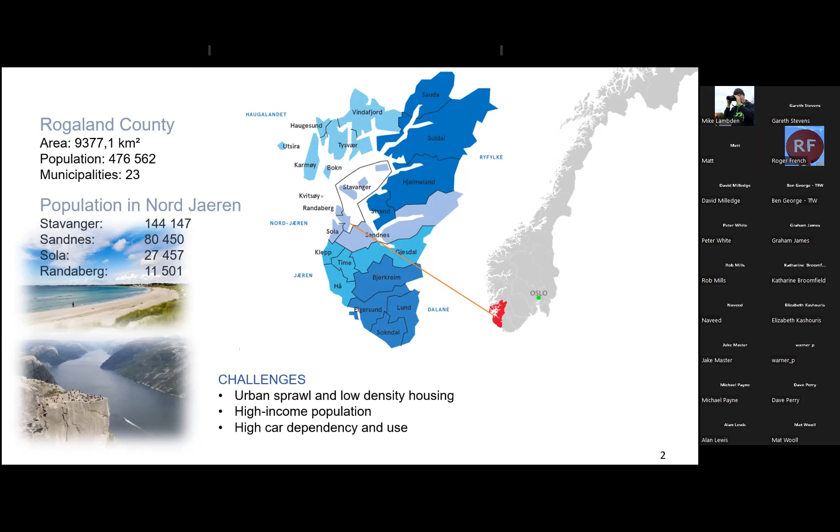A little bit about how the public roads administrations are organized in Norway. We can divide it into three tiers. At the top is the Norwegian Public Roads Administration, who among other things has responsibility for the motorways and regulations. Next layer is the county roads, owned and managed by the county council. Then you have the local roads and streets, owned and managed by the local authorities.

Until the end of 2019, the Public Roads Administration did the planning and building of the county roads for the county council. From the 1st of January 2020, we were transferred to the county council - I repeat, the county council, so I hope you get how it works. That meant a different employer, but the same jobs and functions.

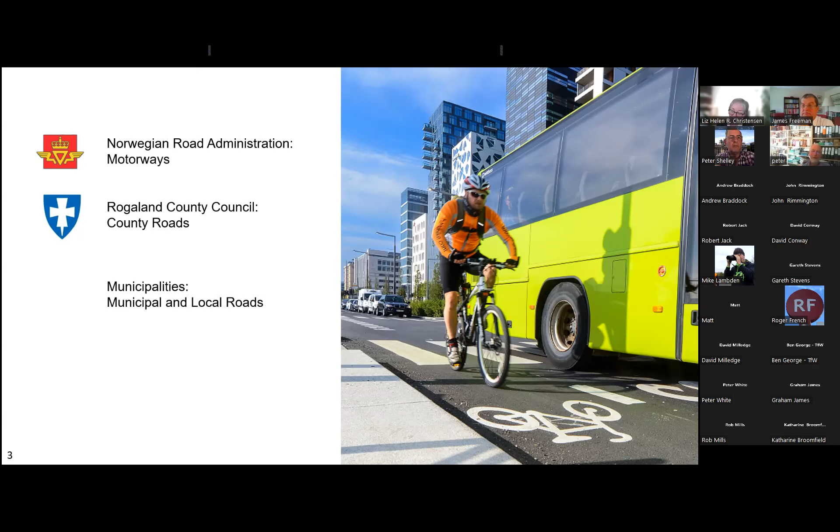This is quite important for Bussveien. The Norwegian Urban Growth Agreement, the UGA, is a governance platform combining transport infrastructure development with land use and transport policy. It is a response to the Paris Agreement. The intention is to stimulate urban growth in populated areas in Norway, among other areas, and thus reduce the need for transport by private cars.

The agreement ensures that Bussveien and a bicycle highway and motorway project have got the necessary state funding - I'll tell you more about state funding later. An important condition is that four municipalities agree, which they have done. Bussveien, though, only runs through three municipalities.

So the zero growth goal means there should be no rise in travels by private cars, and a modal shift from cars to public transport, walking and cycling. Separated bus lanes will ensure that buses will not be affected by congestion. This is important when we want public transport to be trustworthy and precise according to the timetable. Buses will have priority through junctions and roundabouts. In effect, this will be a light rail on rubber tires.

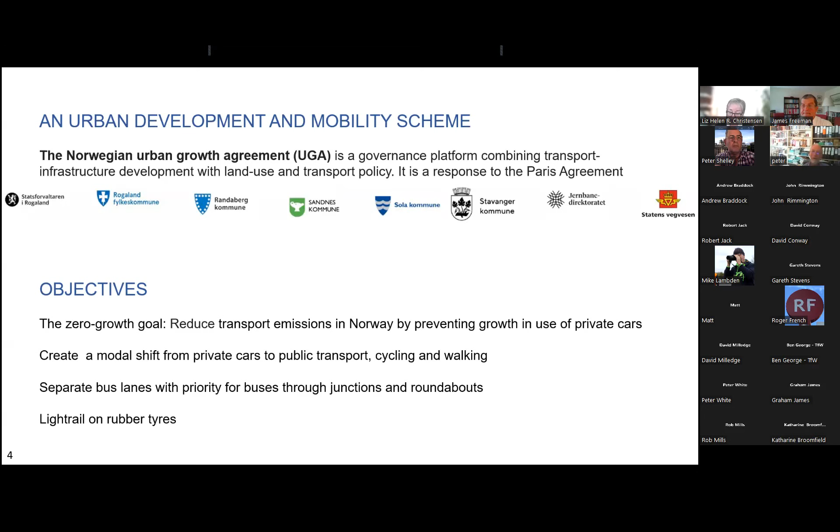We have divided the 50 kilometers into four corridors, where corridor 1, marked with red on the map, is the most important. It runs between Stavanger and Sandnes, the two main cities in the region. It is along this corridor the urban growth and densification will be most significant, and it is here the focus areas are situated.

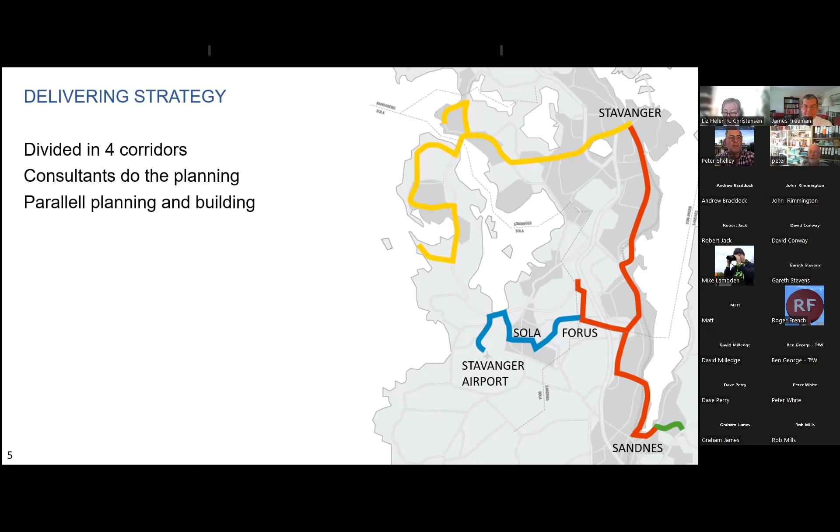When finished, it will be a 50-kilometer BRT scheme with dedicated and separated bus lanes, as I already told you.

The whole project is split into 26 sub-projects for several reasons. It is run as portfolio management, which means it is possible to reduce the total length if it doesn't meet the goals set by the agreement, the UGA.

Bussveien goes through three municipalities: Stavanger, Sandnes, and Sola. As you may see here, I've split it into sections with these black lines.

Four of the authorities have to agree on the decisions. One of the municipalities does not have any parts of Bussveien, but has interests in one of the other projects under the UGA. So I'm sure you appreciate how complicated the project is when we have to collaborate with three different authorities and manage 26 different sub-projects and still make it appear as one overall project.

There are many opinions and voices, not just the authorities, but also in our own organization. Being a public and very visible project that affects people in general, it's even more complicated. It is no wonder it takes time to plan, because it has taken considerable years - more than 10 years in planning, I think.

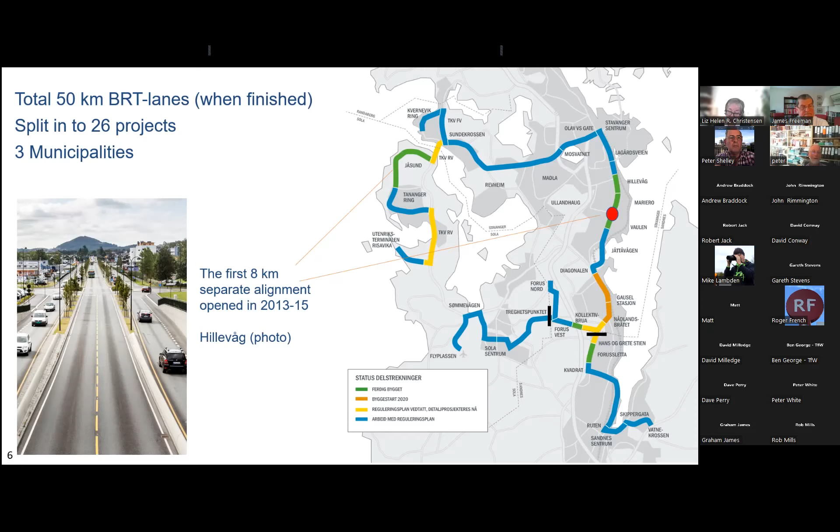This illustration shows how we are separating the bus lanes from other traffic with central reservations. Along most of the line, there are bicycle lanes. As I told you, that's a very important part of Bussveien as a concept.

So there are a few exceptions due to local conditions when it comes to this cross section. We can't do this for all the 50 kilometers. But I'll tell you more about that later.

As a concept, what characterizes Bussveien is first and foremost the separated bus lanes, as I just showed you, priority for buses through junctions, large bus stops which we call stations, and pleasant bus rides and reliability. The concept also includes bicycle lanes and better conditions for walking. That's important too. The county will purchase new BRT buses, which will be recognizable.

I'm told that the drivers will get special tuition to ensure pleasant bus rides. The buses will be electrical, but the decision on which buses and technology will be delayed until later due to the fast development in battery and other technology.

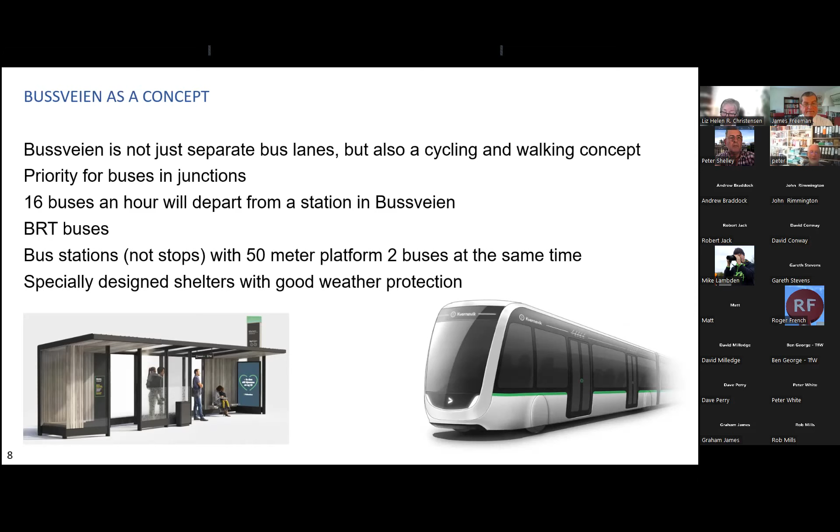The shelters are specially designed, and there will be a pylon with logo. We want the shelters to provide good weather protection, although one shouldn't need to wait more than 4 minutes for a bus to arrive. We want the maintenance of the stations to be advertising financed.

Here you can see the station with the long platforms, and we have a different color on the pavement. The shelters will not be placed like this. We'll start with one shelter on each platform, and standard length will be 6 meters. Then it will be possible to expand with more modules later. Hopefully there will be more customers later on when it becomes more popular, which I'm sure it will.

It is important that every bus station has the same design, so it should be recognizable. We are allowing, though, that the design deviates in the city centers, as local authorities wish to integrate the bus stations into the existing or planned area design.

There are some plans, especially in Sandnes, to transform the whole center, and they don't want this special, like the special pavement. They want it to be integrated in the pavement they will use in the center.

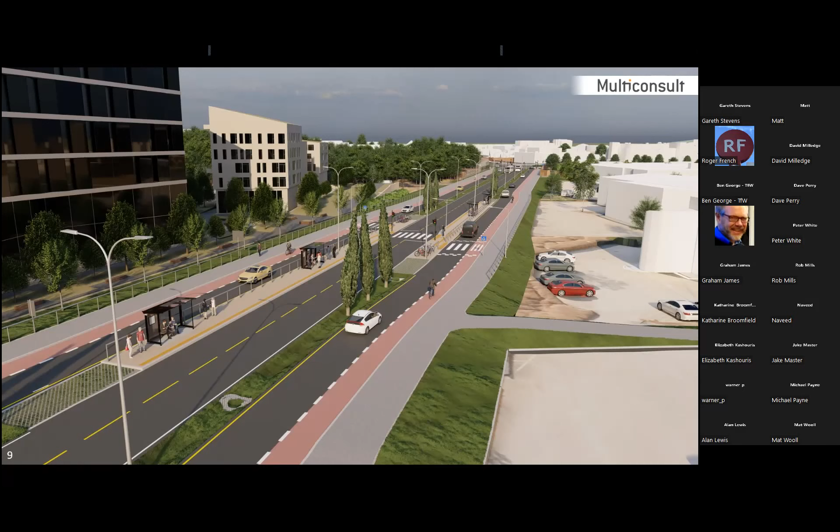The central reservations are designed as NDS, or natural drainage system. This way, nature-based stormwater measures can replace or supplement the sewage system. Another benefit is that the stormwater is led away from the curbs and bicycle lanes, avoiding puddles of water where people walk. It is also cost-saving, and it filters the water before it is released to nature.

Standard width for bicycle lanes is 1.8 meters. We originally wanted it to be 2.2 meters, like the Copenhagen style, but we had to take too much of the properties alongside, so it was reduced to 1.8 meters.

New underpasses will be 6.5 and 8.5 meters wide. That's a huge improvement from the meager 3 meters in existing underpasses. It's very important that these underpasses are attractive.

So we have taken some measures to do that. For instance, we have said that all underpasses should have some artwork on the walls, and the lighting should be much better than it is today.

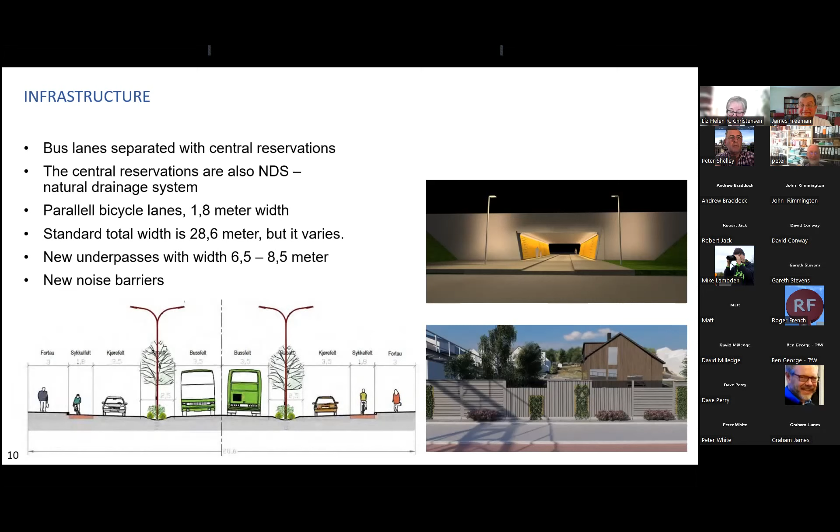The property owners and the developers on each corner are thrilled with the idea of Bussveien. They understand what it means for the area and for the property value.

So in this picture, you see how the underpass works. It's actually around 300 square meters. And if you notice on the outside here, the walls outside are made as sheet pile walls. So the whole Bussveien is a pilot project, and this certainly is a pilot thing, because we haven't done walls without covering the sheet piles before. And now we are exposing them.

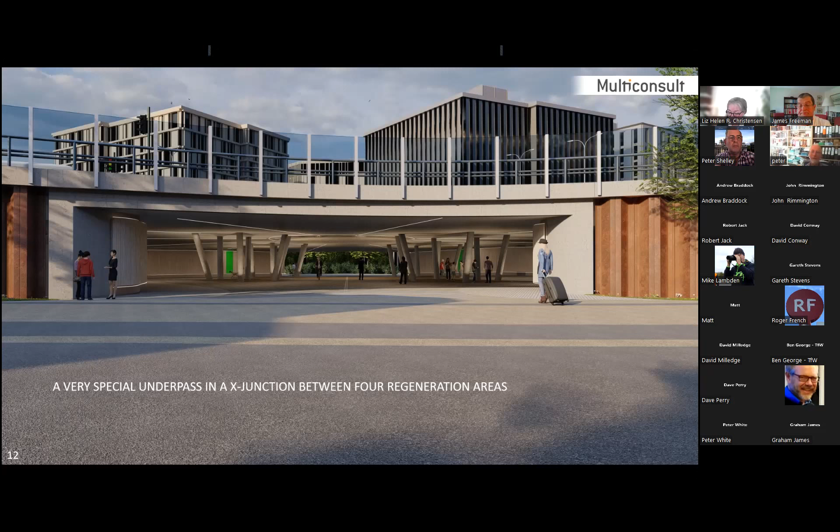But the local authorities liked it and they accepted it. So we'll see what the public means later when it opens. I like it actually.

So we have some challenges. As you can see, the roads are very straight, which I already told you, and this is to ensure the pleasant ride. But the consequence is that we have to purchase properties and bits of people's gardens.

And for those who lose some of the gardens, we offer upgrading of their gardens. But it is not always pleasant for people to give up their home and move somewhere else. We are paying market price, but still it is difficult. We need to see the human side of it.

And there is also the infrastructure in the ground that sometimes have to be moved or replaced, and that is very costly, but it is necessary.

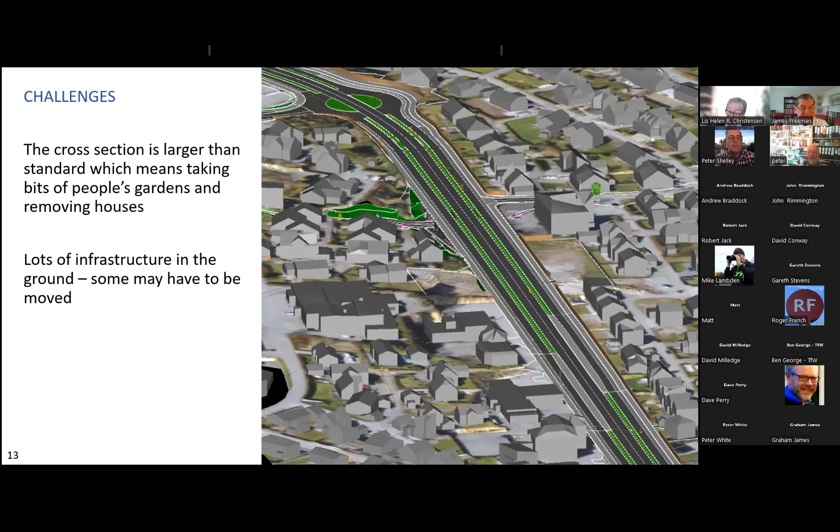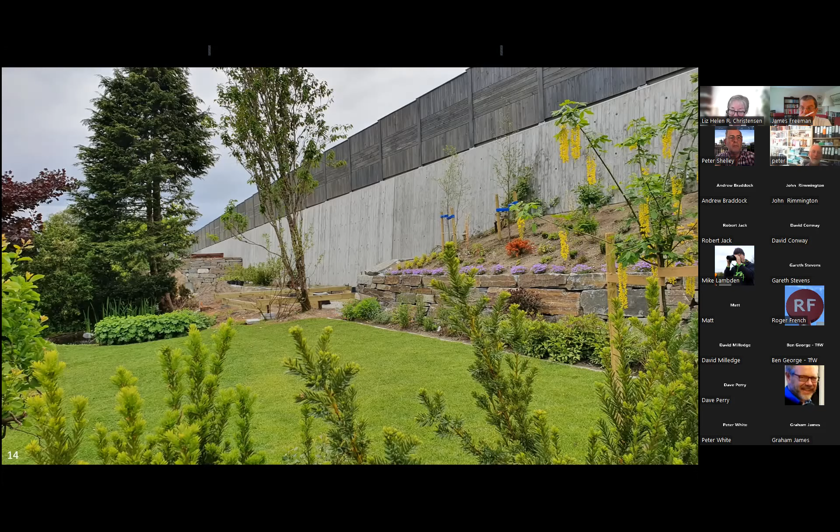So here is one example of how we have to adapt to local conditions. Some areas are important conservation areas or collection of listed buildings. In Sandnes, which you see here, Bussveien is passing through one such area where we have to compromise between the need for cross-section width and what the local heritage administration allows us to do.

And in all this, we have this strict budget regime, and to keep it in the budget, we have to look for ways to do things cost effectively, but without compromising quality.

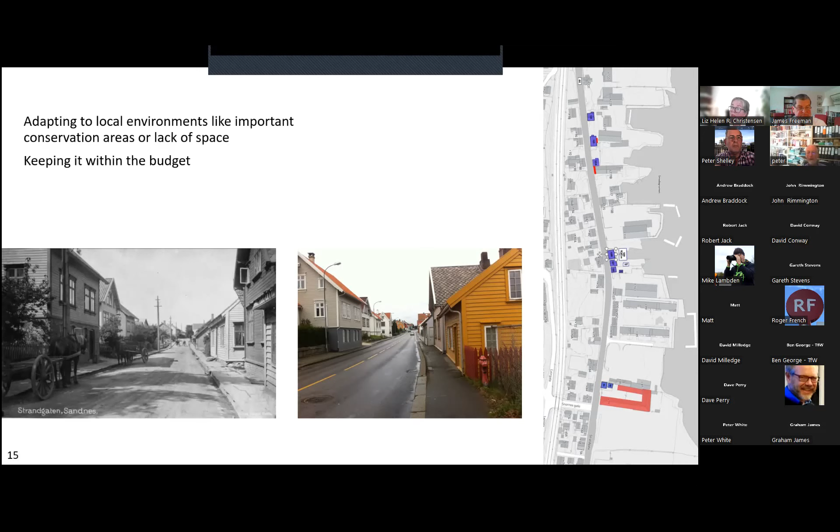But in this case, as you see, it's quite a rundown area, with a lot of traffic. I can't remember how much traffic it is, but we are closing this road, and we are upgrading these houses, both because we are moving them, and then we are going to insulate them against noise. So it will in total be quite a huge upgrade.

So to the financing. This one is a very expensive project. In total, it will be £1.44 billion. It wouldn't be possible to go ahead with this project without 66% government funding. And the rest is financed with road tolls and loans.

A few years ago, there was a social movement against road tolls, and this has had an influence on the ongoing discussions and popularity of Bussveien.

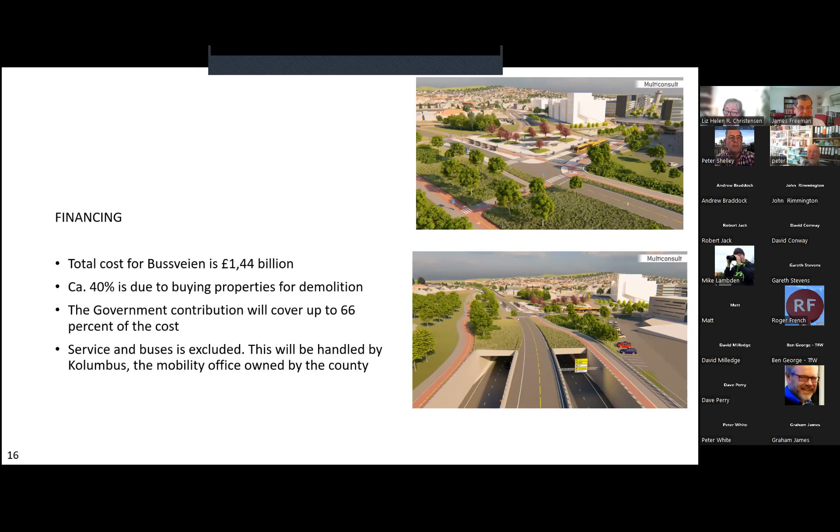But the consequence of the straight lanes for a pleasant ride and separate bus lanes is that the houses need to be purchased and demolished, and we have to pay market price. And that amounts to around 40% of total cost.

We have some challenges. The budget cannot be exceeded. The Ukraine war and the rise in electricity costs has had a negative effect on material prices. Steel, concrete, and other materials are a lot more expensive now compared to the estimates we did 6 months ago. So we are looking for ways to cut costs, but preferably without cutting quality. This is not very easy, because one of the premises has always been high quality, and this is the time to get creative.

Traditional planning methods take time and cost a lot, and new methods are emerging, but the need for a change in work culture is not always obvious for those who can instigate a change. We are collaborating with local authorities, but there is definitely a potential for optimization. Local authorities do not quite trust us because of the history of the Public Roads Administration. They were known to bulldoze through areas when building roads.

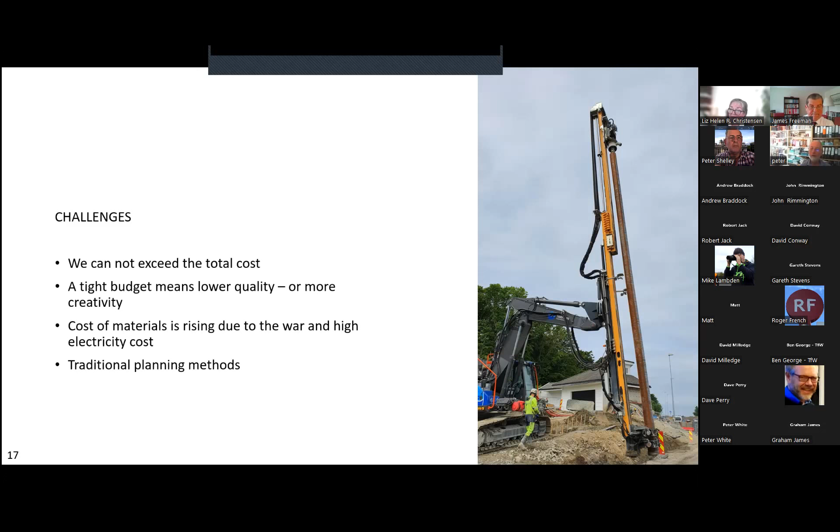And to convince the authorities otherwise is not an easy task, but we are getting there. So, lessons to learn. And I have to emphasize that this is my personal opinion. Other people in the projects may have other opinions. I think that we need to think differently in regards to the planning methods we are currently using.

And how we collaborate. In Bussveien, we are collaborating with the local authorities, but we have not formed working teams. It is still us and them to a degree. We need to be on the same side and agree on the same goals. And I think it's very important to spend a lot of time forming good teams before we start the planning process. Get to know each other and socialize. I think that time spent in the beginning will be time saving later in the process.

This is a huge project, and some of the very costly constructions we are currently building may not have been planned like this today. There should be an acceptance for changes even late in the project. Underpasses, for instance, cost a lot, and with the underpasses, in our cases, comes high concrete walls or other kind of walls. We may not have done it like this if we were to start planning today.

And then I think a good plan for communicating the project to the public is important. This is not a popular project as it affects traffic when building, and taxpayers are not happy to see their money spent on something they really do not want. So I think it would pay off to be prepared for the negative comments and uptalk the project as often as possible.

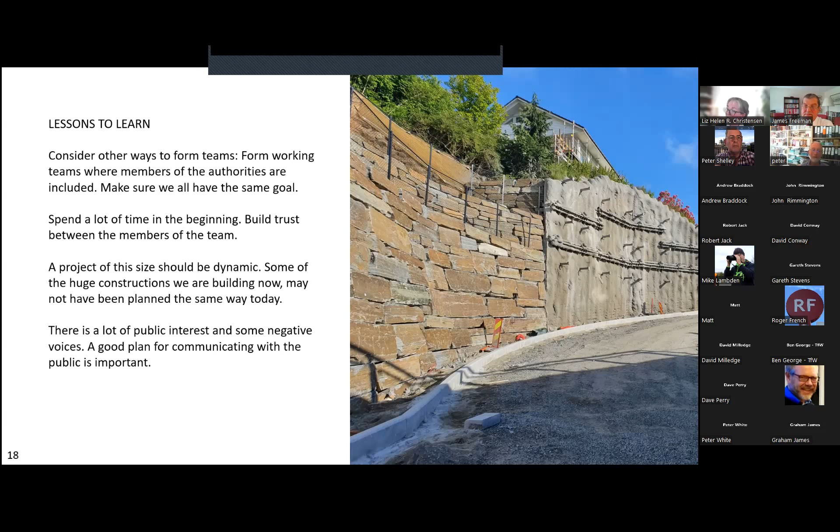So this is what I was thinking of presenting today. As I said in the beginning, I think there's a lot more that could be said. I didn't say anything about politics today. That's actually a masterclass in itself because there are so many things there. So I hope it has been interesting, and thank you.